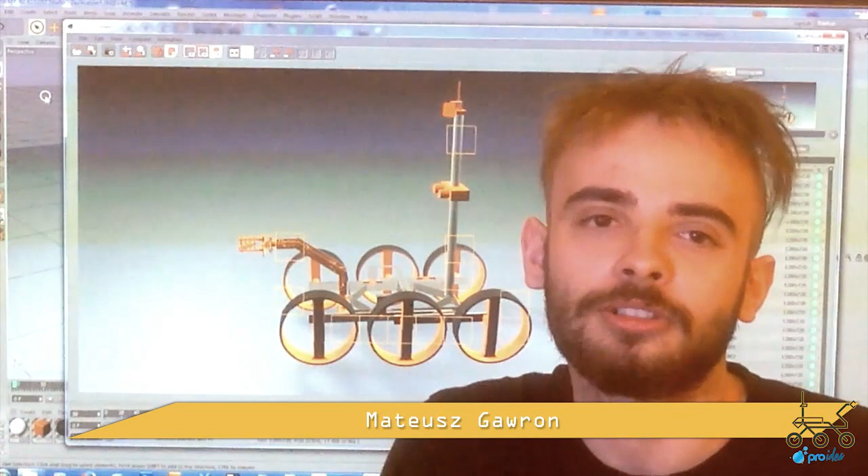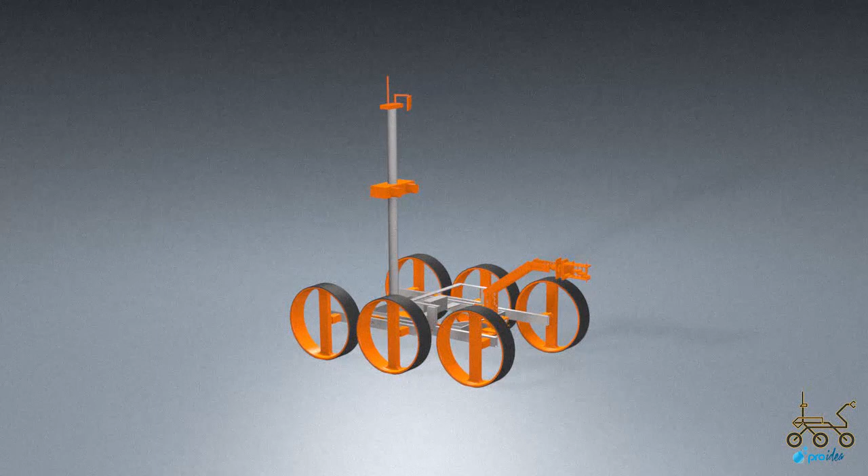As a team mechanic, I faced several challenges during designing the rover's components. One of the toughest for me was how to make the rover able to climb half a meter high obstacles. To achieve this, we decided to use suspension based on the rocker bogie system and 16 inch wheels designed to be as light and durable as possible.

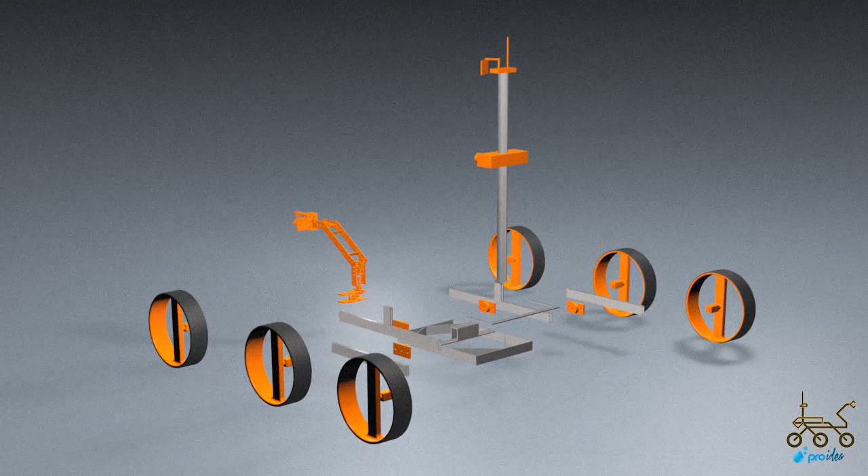Every wheel is driven by its own DC motor with a high ratio gearbox, providing a suitable amount of torque. Big wheels of course necessitate large sizes of all other components, so it is a very hard task not to exceed the weight limit. Other curious experience for me was designing a mechanical arm.

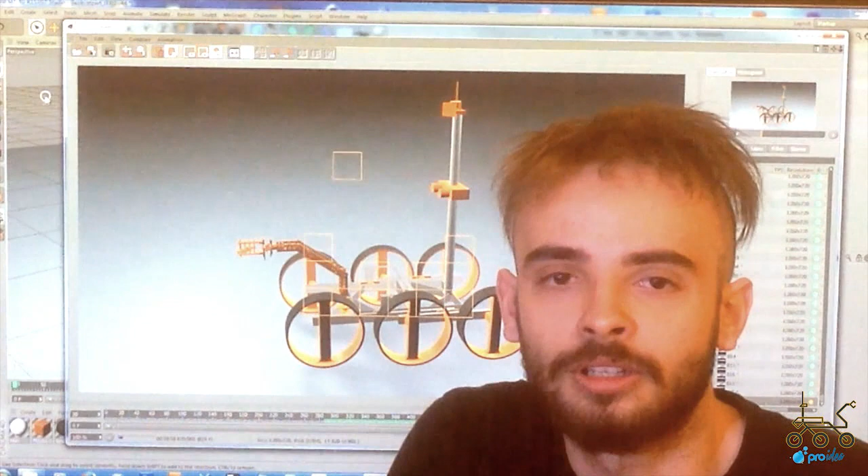It's able now to lift up to 10 pounds, and thanks to having 6 degrees of freedom, it has great maneuverability. Our communication system is based on 2 transceivers for 2 frequencies. 2.4 GHz frequency is supported on rover by Ubiquiti Rocket transceiver and 2 omnidirectional antennas in MIMO standard, modulated with direct sequence spread spectrum, and in our base station by the same transceiver and Yagi antenna.

900 MHz frequency is supported by Ubiquiti Rocket transceiver and 2 omnidirectional antennas in MIMO standard and panel antenna in our base station. On rover side, router is connected with our onboard computer and 2 transceivers. Video packets are sent on frequency 2.4 GHz and other packets with rover control or telemetry on frequency 900 MHz.

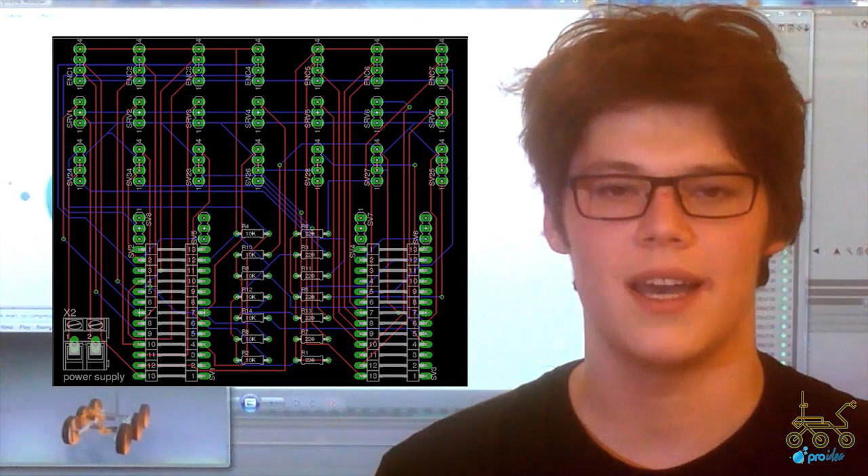Electronical project requires PCB-like protoshield, but designed by us, for each microcontroller with corresponding outputs and connectors for components in subsystem. For power supply subsystem, we chose LiPo packets connected to current and voltage stabilizer, fuse circuit and safe start peripheral. I had to choose rover computing and vision hardware and layout.

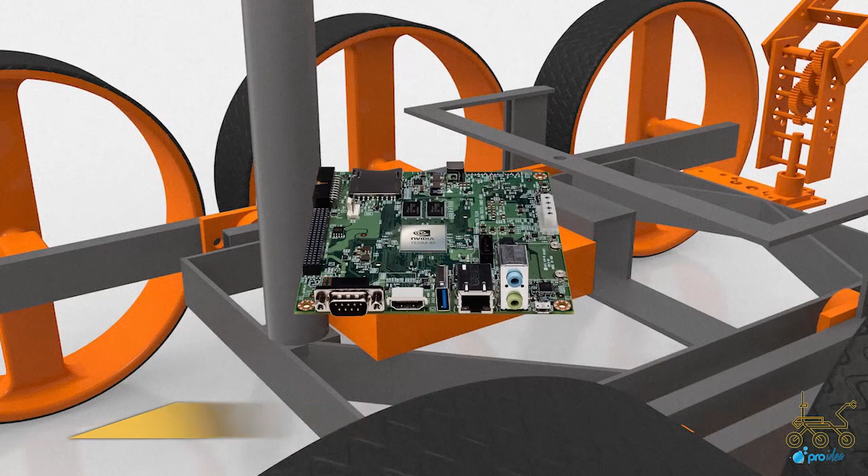We have decided to use NVIDIA Jetson TK1 running Ubuntu-based operating system with CUDA-capable OpenCV support. Primary vision system are 2 twin 720p 30fps cameras suspended on gimbal-like mount on rover's antenna mast. Secondary system is low-resolution 1.3 megapixel camera mounted on rover's robotic arm.

Software consists of 3 main components. First part is C#.NET Rover Control and Management application for Windows PC. Second is Node.js daemon running on rover's Jetson TK1. Daemon is responsible for streaming video and stereoscopic images, responding to commands and passing telemetry, GPS and accelerometer data.

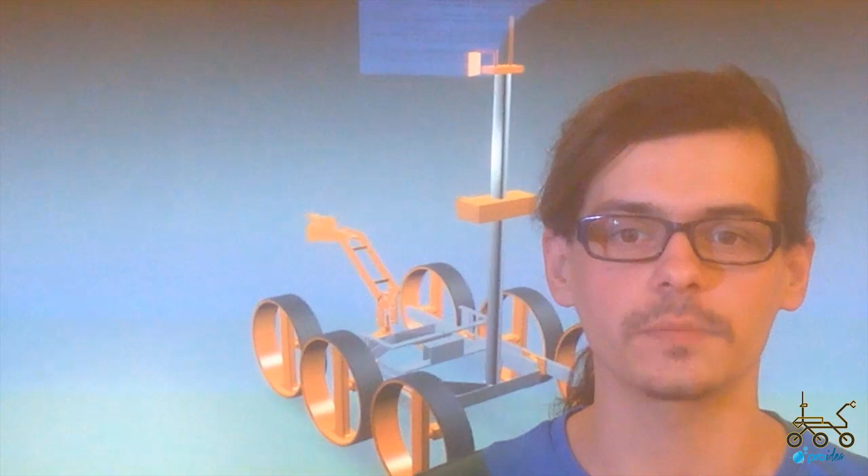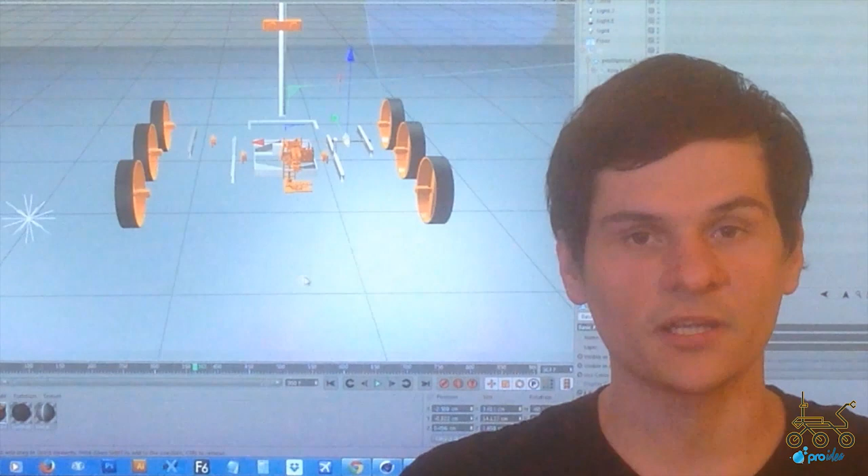Software communicates over network via WebSocket HTTP eventing based on Socket.io library. Daemon communicates with third layer of software stack running on Arduino microcontrollers. Arm is driven by continuous servos with incremental encoders that provide feedback for microcontrollers. We also use optical-based sensors to make positioning in Cartesian coordinate system possible.

Microcontroller code contains PID controllers responsible for synchronization of joint movement. To simplify the problem of steering, we had split it to arm with 3 rotational joints and spherical wrist. More complicated functions such as ANFIS network for arm positioning are implemented on Daemon application.

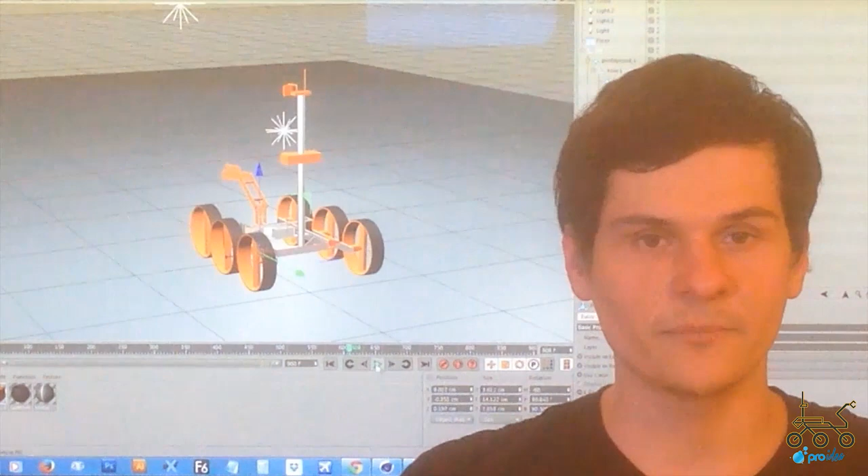Lab equipment contains sample collection tool, which is a specific drill mounted instead of a gripper, and revolving magazine for soil samples. We designed 3D printed vials which enable us to operate samples without mixing soil layers.